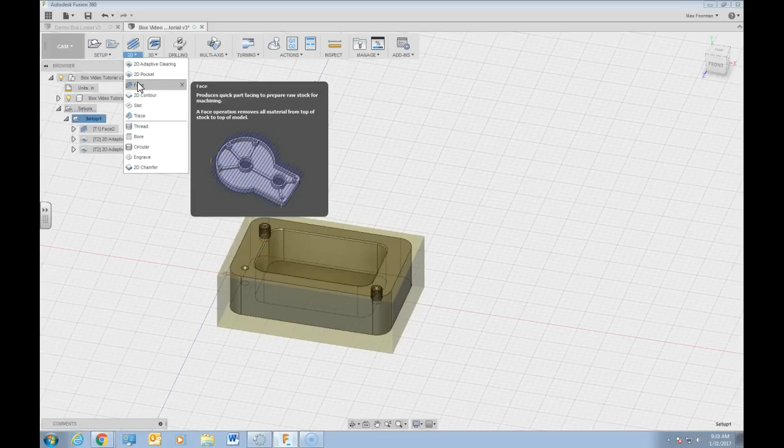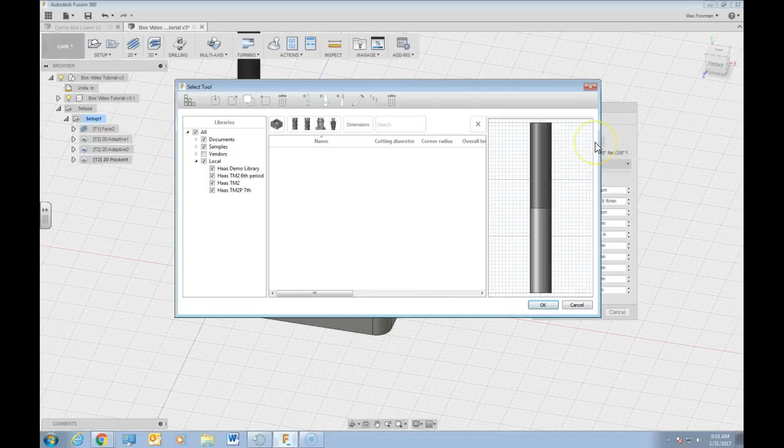My tool carousel is rather limited on the vertical machining center we have. We only have 10 total tools, one of which is our probe, so we're a little limited in the number of tools we can use. If you have the tool carousel capacity, you may actually want to use different tools than the ones we use to rough. But in our case, we're going to stick with the same tool that actually roughed the operation before. It's going to also be the finishing tool.

So here we go. We've got here is the flat 3/8 inch diameter end mill. So that is selected. That is the correct one.

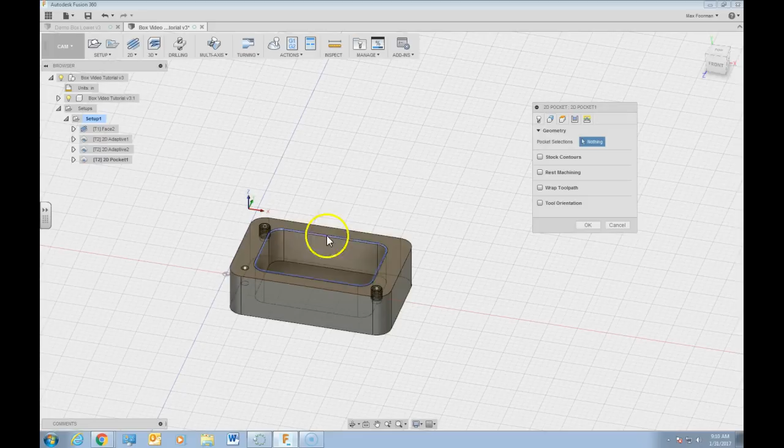What we're going to do now is come to here to geometry. And again, we're going to select this pocket selection here, that chain right there. Now heights, same deal, don't have to alter much there yet, but we'll see what difference this makes, what we might want to do after we simulate it the first time.

So now we're on the passes tab here. Here's where things are going to get a little bit more interesting. We need now to select finishing passes. Now once you select finishing passes, maybe a little foible here with Fusion 360, it adds in an option above where you just clicked off up here for this compensation type.

This is going to be really important that we're going to want to take advantage of this. We're going to come down here where it says in computer for compensation type, and it talks about what this is. But what we're going to want to do here is select wear. Okay, and then it's going to give these other things. I'm going to allow the compensation radius to be okay there.

Finish, we're not going to alter anything here yet. So number of finishing, we could leave this as 1 for right now. Step over, 37.5 thousandths, okay sure fine, leave that as is right now. We'll leave off the repeat finishing pass for now, we can come back and see that later.

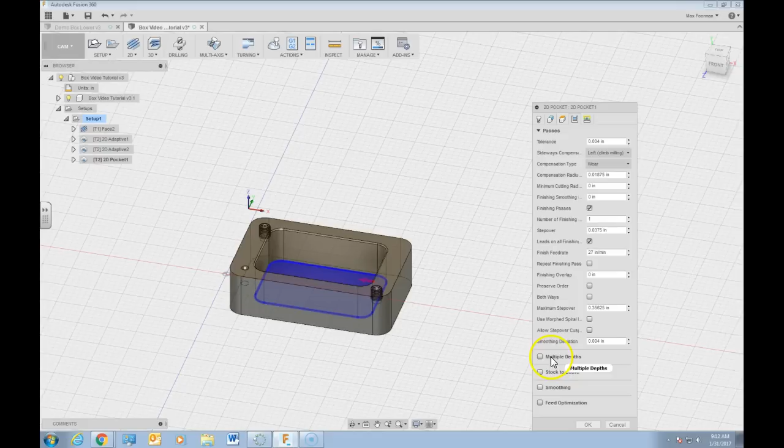But what we're going to want to make sure that we do is deselect this stock to leave right now. If we leave this checked, we're not actually going to really remove any material so much that we did before, but we actually want to finish out right here. Again, we'll leave multiple depths off for right now, we can see that later. We do that, but here we go.

Linking parameters, not really changing much in here yet. Zoomed in and out, this dialog here. So here we go. We're going to click OK now with all of that stuff that we've entered in. It has now created this tool path.

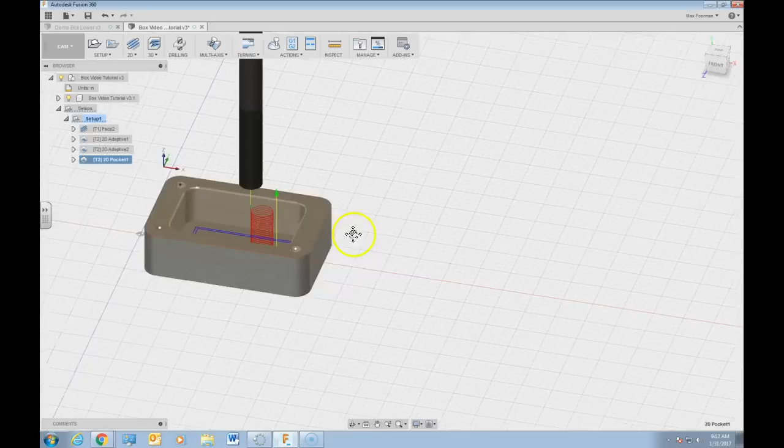Now if we simulate this whole thing and play, I'm going to jump to the next tool because I'm not really concerned about this. We know that this is clearing out that pocket. I'm going to jump to the next one. Now we're clearing out the outside that we did on the other operation. Now here I just jumped into the finishing operation.

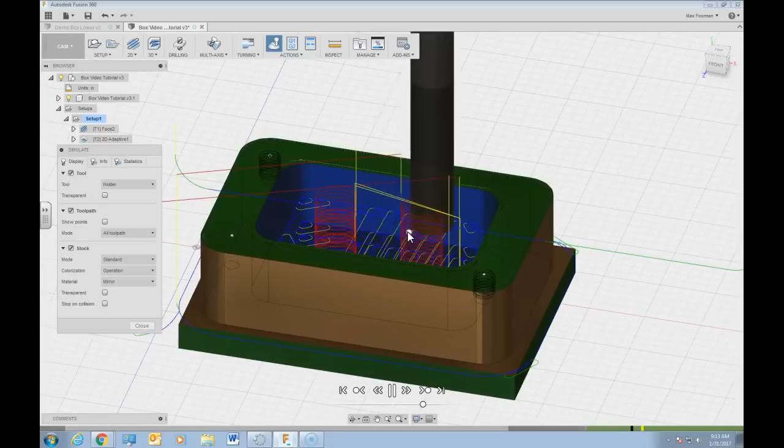So what we're doing right now is we're helical interpolating down, but the thing that comes to my attention is we're helical interpolating down, taking our time getting down through material that isn't there anymore. That's just air, it had been roughed away. So that's one thing I'm noting that we could do better.

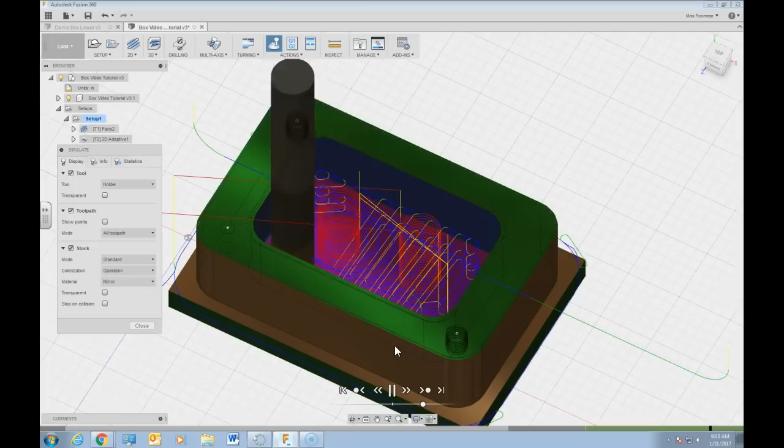Now we're hitting the floor and we're walking around, coming around to finish out the floor of the pocket, and then now that's doing the walls of the pocket all at once. Okay, so I'm definitely seeing that there's some improvements we can make. So in terms of just basic optimization, this is wasting us a lot of time by coming down here, round and round and round through air. We're cutting air, that's not a good thing.

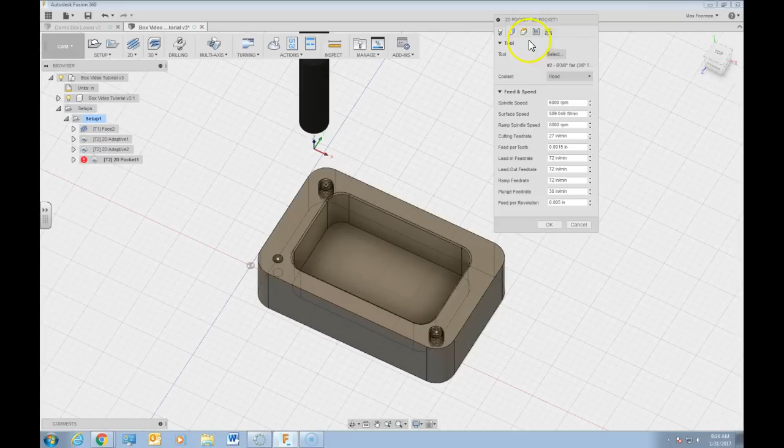So what we're going to want to do here is come back to 2D pocket, we're going to want to edit that. Now, knowing that we removed all this here, if we come back to heights here, so top height here now. This is from top height sets the height that describes the top of the cut. Top height should be set above the bottom. Top height is used together with subsequent offsets to establish the height.

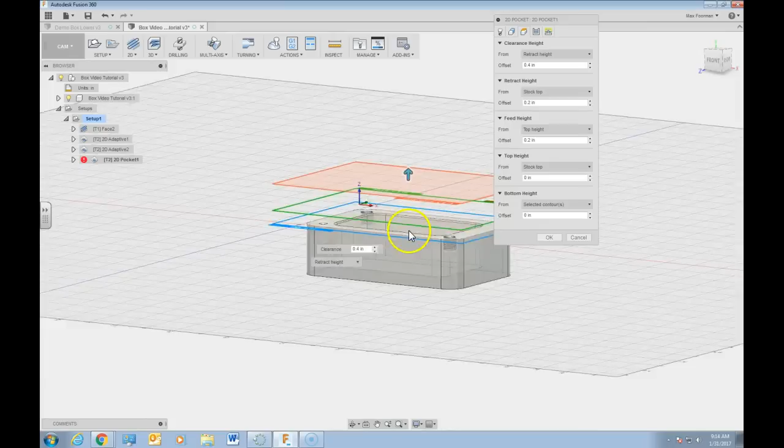So instead of doing, right now it's coming from stock top, which if we were to look at this here, stock top was somewhere, what that's referring to is the stock that we had created in our setup here. That's way somewhere if we were to look at the front of this thing. Compared to everything else, that stock top is going to be somewhere up over there, is where we're starting our whole interpolation coming down.

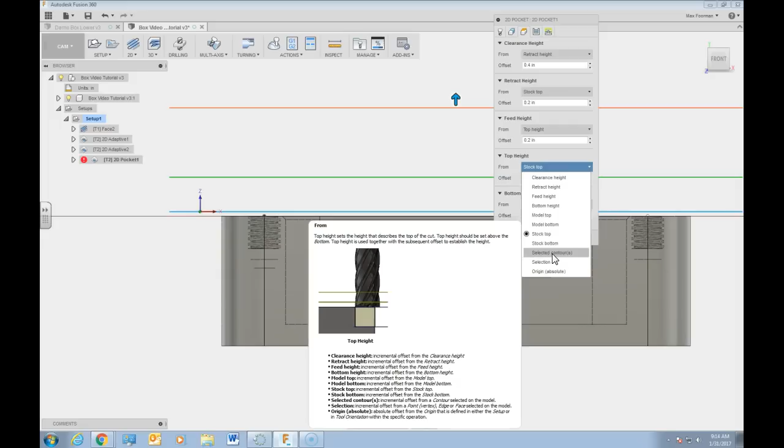Now instead of doing that, what we could do is, from our selected contour, where we had selected the operation to begin. This would be hazardous if we left it this way. It would come all the way down and then start cutting, it would just literally plunge into the part.

But say we knew that we were leaving 20 thousandths of stock on the floor of this, just to give ourselves a little bit of room. From the selected contour, we can make this 0.030, 30 thousandths of an inch above the bottom of where we're going to finish out to.

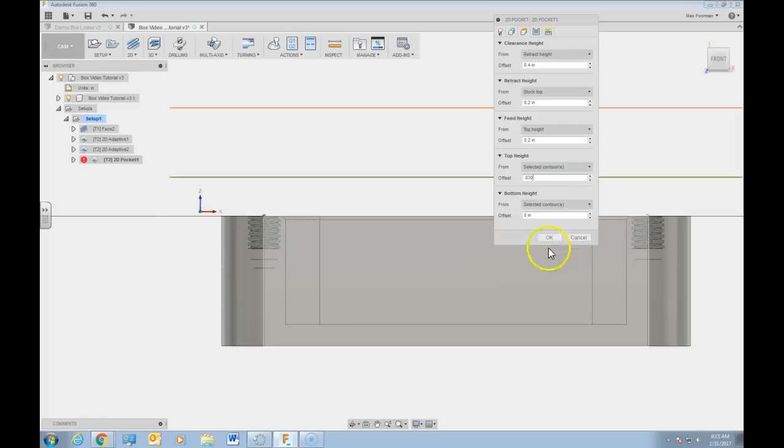And now if we click OK, and we cursor around here, look at that. We started a lot more effectively lower down.

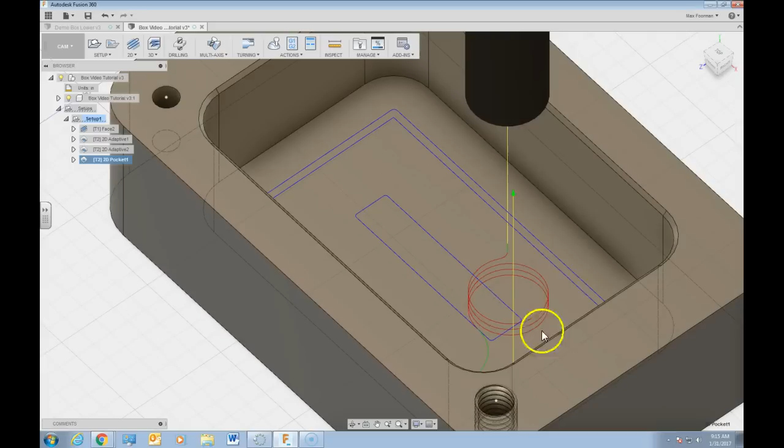In the bottom of the pocket. Now the other thing too here is it's taking kind of 1, 2, 3 loops around. Depending on the tool that you've got selected here, I'm going to come back and edit. I'm doing this just to show that we can alter and change these things to optimize a little bit more.

So what we want to come into here is under linking parameters, down at the bottom here where it says ramp. Now we've got ramp type set to helix. We can either plunge, that's just straight down, or predrill, if we had a hole or something else that we had created, we could come down into that.

Zigzag is moving linearly back and forth. Profile is going to be following the actual profile of the outer edge to come down. Smooth profile I think is going to do, yeah, you can read those a little bit more carefully. But we can leave it at helix right now.

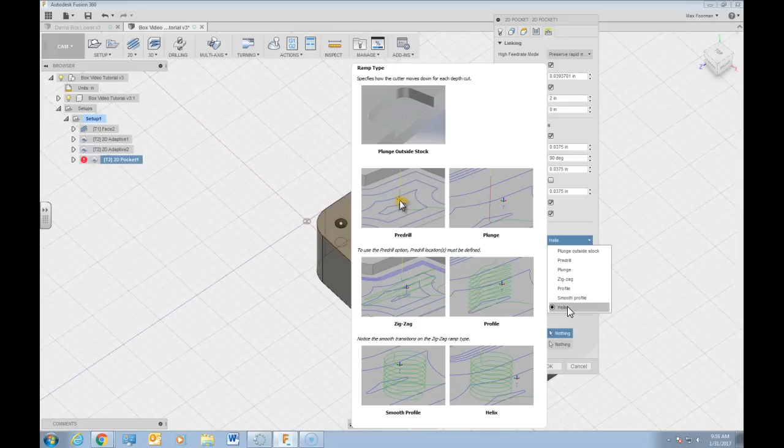That's just simply going down in a helical fashion. Now instead of leaving it at a 2-degree ramp, we could actually crank this up, say a 3-degree ramp, and see how that changes. I'm going to click OK right now.

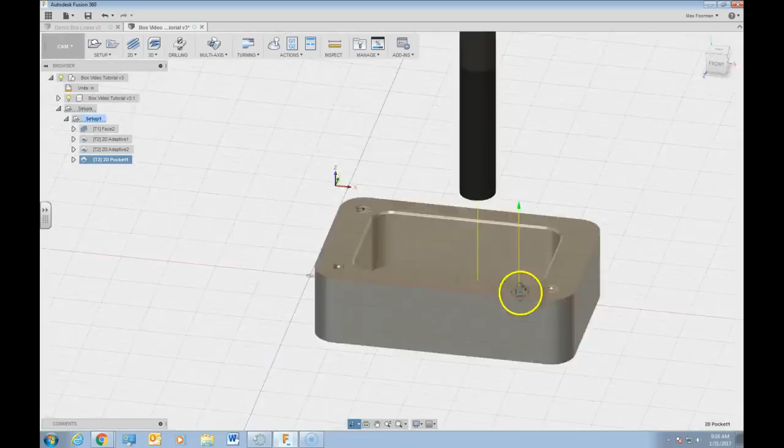And now instead of 3 full passes around, it's just taking a little less. It's doing it, it's going to come down a little bit faster. You can make it steeper depending on the tool you actually have, or if it's center cutting, or for this small amount that we have, we could actually change this to be

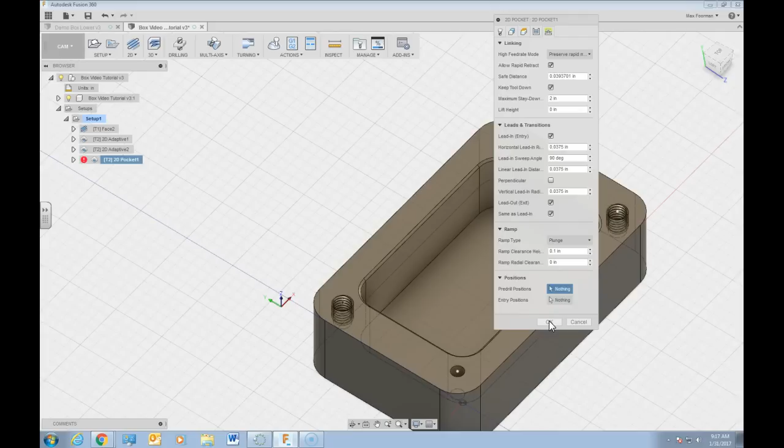a straight plunge, if our tool was center cutting, which the one we are using is. Though it may not leave the best surface finish on the bottom of the part either, you could get some witness marks there.

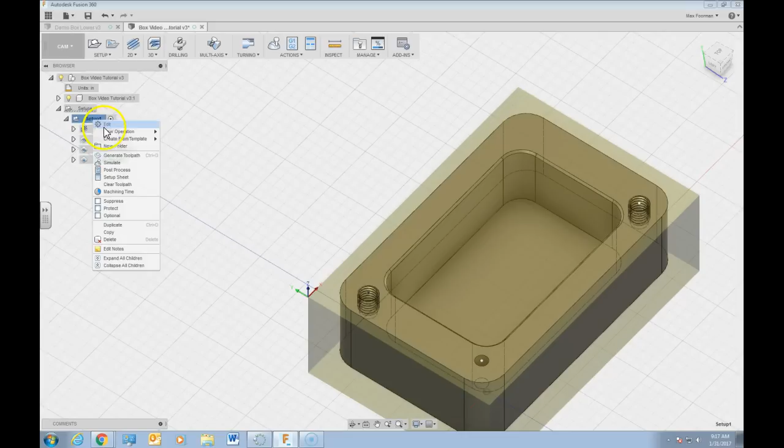But these are all things, depending on what your operation and how much you really have to optimize or cut time out of a process, these things very much can end up mattering. But that's then how you can start editing those things to make the tool paths much more close to your desired optimal.

So again, if I step through all this, come back and take a look. So now that's coming down a lot more effectively, a lot faster to then remove that material out of the pocket, or excuse me, finish out that pocket.

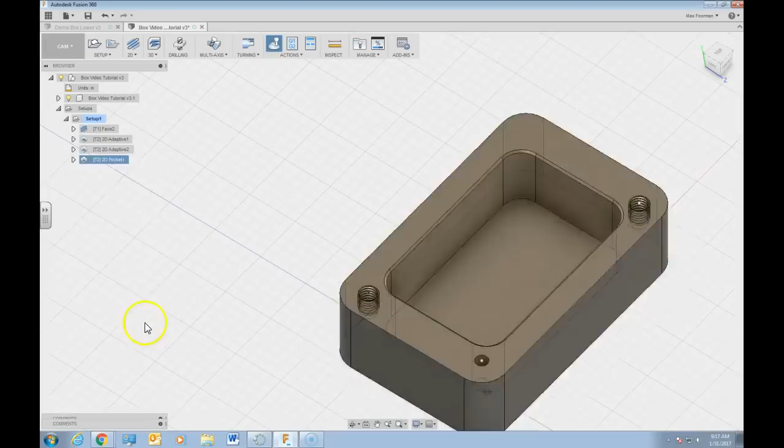Okay, the last things here in terms of quality of this that I'll cover, if I come back in here and edit, it's a very subtle thing, but where this tool was entering in on this profile and where it was exiting the last time was at the same point.

Now the other thing that you can do here related to passes that can help to improve the quality of the cut that you get in the end is, one thing is repeat the finishing pass. So depending, this is what's taking, colloquially, is known as a spring pass.

So it's literally going back over this, it's not changing at all on the very last time around this part that it goes. So it's doing the same one again, repeating that. And this other dialog here is finishing overlap.

So this will allow the tool to not just start and stop at the same point, but say go 100 thousandths beyond where it started. What this can help you do is make sure that you don't get a little witness mark where you actually enter in and exit each time. So as a best practice, it's usually kind of good to do that as well.

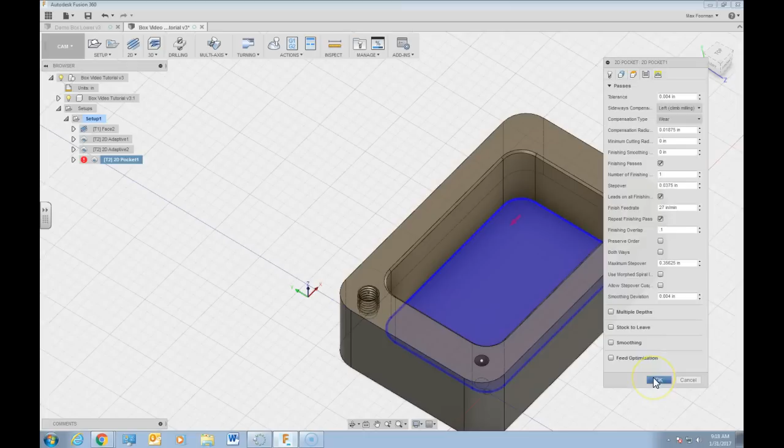So now what's going to happen is if I simulate again this whole thing, and I'll jump in to the last. We'll come back on that one. Hit play, we'll move this up a little bit.

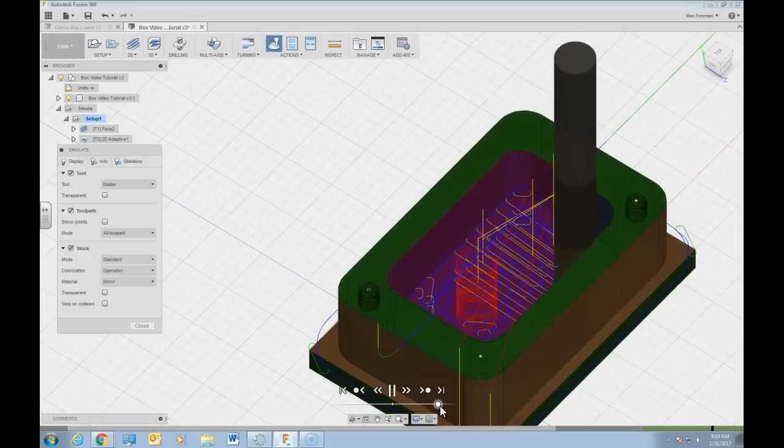It's going to finish the floor of the pocket out. It's going to come around once. It's going to go back around again.

And if you had noticed, where it's a little difficult to see, but where it had entered in on this wall, it's actually exiting 100 thousandths further down to the left there. So that helps to smooth out the wall and give you a better finish on that wall ultimately. So that's the end of that pocketing routine.